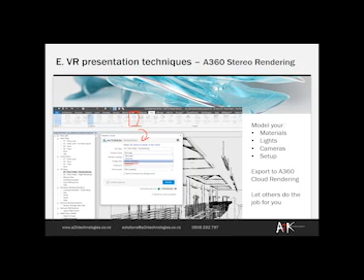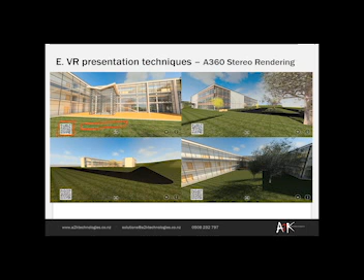So quickly catch up about our A360, where we actually find this. We just go here into render in the cloud, and our dialog will pop up, which then allows us to select a stereo rendering, and we can then experience this. With these codes, we can send the QR code to our client, or a big long code for our web browser. By the way, we can experience this in our web browser as well, and basically watch the rendering and have this interactive landscape.

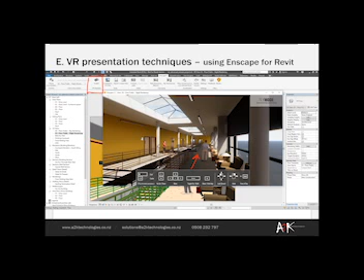Just as a tiny recap, you might have heard about this in the last webcast, where we can also walk through interactively with a virtual reality headset and experience this. Attaching a virtual reality headset is basically nothing else than attaching another monitor, or two more monitors, to the computer. The only tricky part is that the graphics card needs to be a little bit more powerful, because the software needs to address these two screens for your left and your right eye independently, not like Windows commonly does.

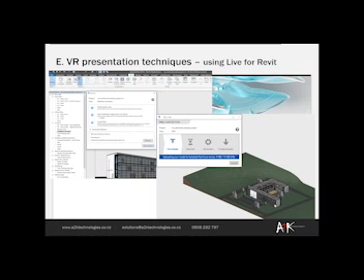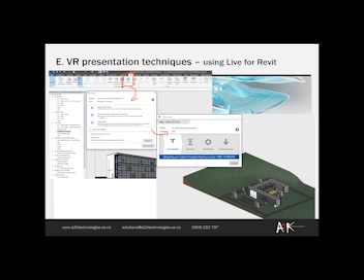So in general, the graphics card needs to have at least twice the power, or better, three times the power, to generate these frames with at least 90 frames per second, because otherwise you might feel motion sick. We have here our Revit. When we go with Revit, if you want to go live here, this would allow us to convert the scene. The reason why we have to do this is that we actually have two types of system in our computer world. Good.

So once it's been converted, we have this with our live application, and we can actually explore this. In the meantime, we also have whole projects. We can just double click on it. They run on their own, so that we don't need any live viewer anymore. You only need a live viewer if you want to do a bit of authoring of different scenes, or adjust your presentation a little bit. But today we want to do this with interactive and have a bit of a play.

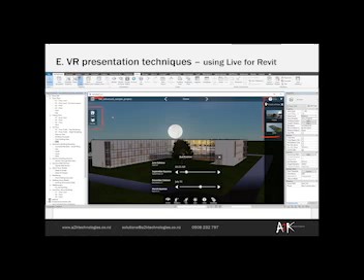Good. So now let's have a quick chat about the two different types of system and why we have to convert this with Live. On the one hand, we have Revit running, and on the other hand, we have Live. Because we work in Revit and we want a very good, glossy, perfect presentation, we work with physically true materials and physically true lights. So with Revit, we actually have a physical system.

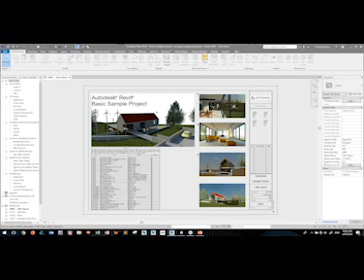So when we now have a quick look into our Revit, come on, be nice to me. We should find here, for instance, an example file. I'm just demonstrating this with example files here, and you might remember the example file. You can do this as well. So if you want to follow this, I can ensure that everybody has these files, and we see here our Revit example file.

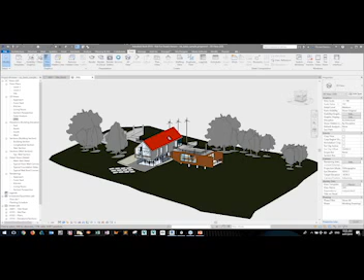So what we want to do is present this now in a virtual environment. So we can go to our view, and we just go Live here and send this out. What Live then does is it immediately downloads a folder, and what we have in this folder is the conversion which comes from the server. So we have our Live project. This is the file you would open up with your Revit Live, but we have shown this in the other webcast.

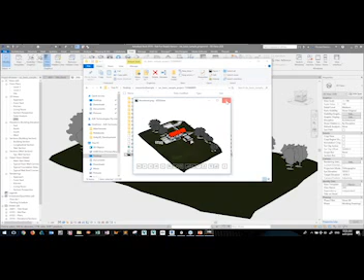So we actually want to see how we can make this interactive. Our Revit architecture basic sample file here with a long number is actually our 3ds Max Interactive project, including also the thumbnail and anything else with it. So we can immediately connect and patch this to our 3ds Max Interactive and start, for instance, exploring this. In the first webcast, I had a tiny run-through of some of these folders and what they actually do.

The advantage is when you convert it, you also don't need to set up any scripts around your virtual reality gear, because it immediately includes this. So if you have any units, for instance for your teleport or for your controller, as well as anything associated with it, you see this in the scene; it immediately comes with this conversion. So it's really cool.

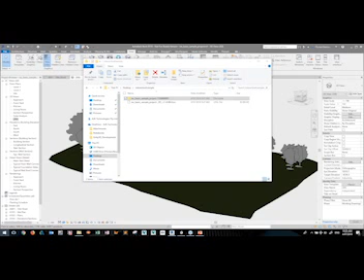Good. So when we go to our Interactive, somewhere we should find a tiny Interactive. Here it comes up, and gives me the opportunity to start a new project.

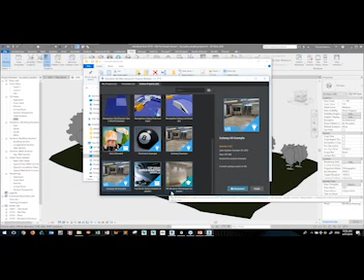If you have time, and well, it's winter anyway currently, and if it's a little bit rainy outside, just have a quick look into some of these online projects. There's some really cool fun stuff you can explore, be it a subway, which has a nice good graphic representation, or also the virtual reality museum, where you have a lot of toys you can play with. These are good scenes to warm up with this whole interactive environment.

Good. So we have here some projects, and I want to add my existing project, which is my live project I just converted. This is the folder here, which comes from my server. So live, and then we have here just .stingray project. In the past, you had to unpack the Stingray project, which was a zip folder, and then you could edit it as well. But here it comes already unzipped, and that's actually pretty cool.

So I quickly open this up. We see our icon, and on the bottom we have here levels, because every computer game has, so to say, levels. So this is how this is being organized. So when you have, for instance, multiple design options, you design multiple levels for your client or for yourself. Good.

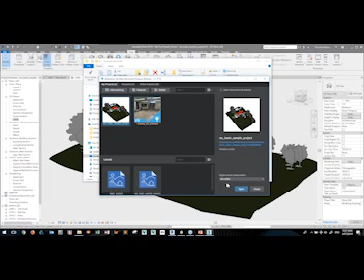So we want to take this project and open this up, and my interactive environment should now compile it, because we are in a development environment. It compiles. Compiling means that it takes my whole content, everything I have set up, my materials, my lights, my scripts, literally anything and everything, and gets it ready and translates it so that the CPU can process this. We see on the bottom right, for instance, my data compiling, and it runs through the assets.

On the right hand side, we will find our Scene Explorer. We find also our property editor. Now it might take a little bit to compile the whole scene, but then it should work. It should be nice to us. Good. That gives us a second to talk a little bit more about the user interface, so we can adjust this, which is good.

On the bottom left, we have an Explorer-like environment where we can browse the assets. Because we develop, we are working with a project folder. We don't work with a single file, so we have a lot of individual files. They're connected with each other, and scripts have been programmed and associated with our geometry or with our environment. On the top, we find our viewport.

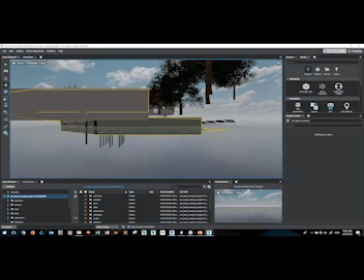So any interaction, or any script, is then being added on to our component. So let's see if Max is nice to us. Yes, 3ds Max Interactive, is working nice. We probably need to zoom out a little bit for that, and come on, be nice.

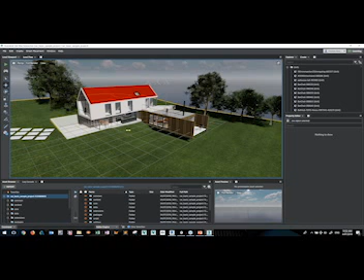So quickly about the navigation here. How the navigation actually works is, we use the left mouse click or left mouse button to select something, and we use the middle mouse button to pan, and the right mouse click, the right mouse button, to roll our view. It's a bit sensitive here. If you hold Alt and use your left mouse button, you can orbit from your current point. And if you use your right mouse button with Alt, you can zoom in and zoom out.

Brilliant. Need to move this up a little bit. I actually always wondered about the red roof, because I think it's actually very, very poppy. So if you want to touch up the materials here in Interactive, you can do this. It makes use of some basic maps, be it a diffuse map, or a texture, and also a UV map.

When you want to develop, or add on any assets, they need to be within this project folder. Same thing is like in Unity as well, they need to be within this project folder. Then you can connect and patch it up, and the project knows and understands that you can have here your artificial world, and apply the new texture to your new artificial world.

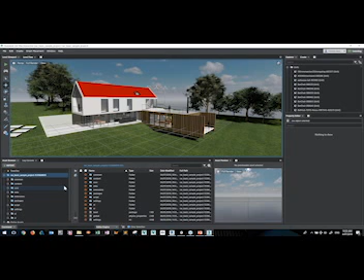So let's select, for instance, this roof. We get our common gizmo when we want to move these around and about. On the right-hand side, I need to touch up my Explorer a little bit, because otherwise I don't see my materials down there. So I need to just drag this up a little bit. And there are my associated materials, these are the materials converted coming from Revit.

You see here these two materials, which show that we have kind of two layers or something. We have here the gypsum wallboard, which is probably the inside of our roof. And then we have the metal something, which is basically the red part of it.

What I really like is when you work here and touch up your assets, you can immediately go to the resource. When you click on this, the machine works and looks and searches the resources for you. When you have an artificial world, you might have dozens of resources, which might make it harder to follow. So hence, it's good to have a very organized structure. If you want to store all these files just on your desktop, believe me, you won't be happy.

So hence what we want to do is, let's change this red material a little bit, I think it's a little bit poppy. So I would go here to my data, use a right mouse click, and say I want to create a folder here. Let's call the folder, for instance, images, something where we want to add on my custom images.

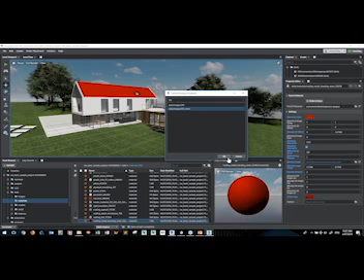I have adjusted it and added on a little bit of a normal map, and we see now here we have our material on the right hand side, right bottom. When you have a look in the scene, it actually also updates it.

That was here we need to go, just slipped from my alt. It can happen. So we see a little bit of a texture on it. Why not? So we want to have the bump map a little bit more crispy. Let's say we want to have maybe a 5 here in my bump amount and my value, and we see there are updates, so now we get a bit of a texture on it.

It's good. So the tint color sure is red. Now we want to make this maybe also a little bit more greenish here, so that it blends a little bit more into the environment. However, I'm actually working with my tint color here. We actually need to have my generic color up there to work with.

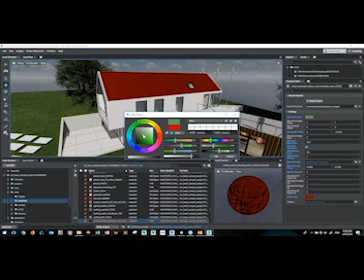Let's see, otherwise we can try both. So make this maybe a little bit greenish here and see. Good, didn't change too much. Here we are now together, together we are strong. So I have my tint color here, make this maybe a little bit darker, so that it blends a bit better into the environment.

So now, when you want to change maybe just simply the color, select it, for instance here. We find it's a little bit more, we can maybe adjust here. I think instead of having this brown wood, we want to have maybe a little bit of a bluish wood, for instance. I think it's here somewhere, our finish interior timber cladding. Let's go there, let's have a look into this, and see does it change it?

Yes, that makes it, for instance, also a little bit bluish here. That's good. Hit OK. And we want to add maybe also a little bit of a different

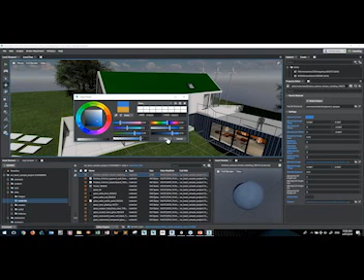bump map, for instance, here. Let's choose, we had, for instance, here, the 191, add this on actually as well. So we see that we can still actually adjust this afterwards. And also we can work here with our sizes,

Tile it, make this a little bit different here. And we see that we have actually a nicer different cladding. So anything you can set up, you can actually also adjust. So good.

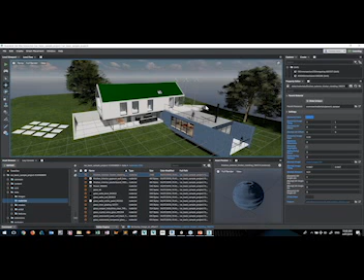Good. Let's have a look a little bit into the lights, because we want to make this here actually a little bit interactive. That's what the whole session is actually about, how we can actually do this. And so let's say, for instance, we want to have here

I probably wouldn't get a job as an architect. Good that I'm an engineer.

And we have, for instance, here our lights. For instance, here, maybe we need to zoom in a little bit more. We can basically zoom into the building.

Then we can select, for instance, here our lights. Good. So we have here, for instance, our lights now selected. And so I want to add a little bit of a functionality to these lights, like it would be, for instance, a game where I can, for instance, want to dim these.

We have here now the option with our level flow to wire up logic. Similar, you're probably familiar with Dynamo. We can look, for instance, here for our lights on the right top and say, for instance, here light. Take, for instance, the unit, literally basically in here, and then start wiring up, for instance, here our logic.

Like in Dynamo, we wouldn't have the option to look for our nodes. We can access the nodes just through our right mouse click. So we have here our level unit we actually want to work with.

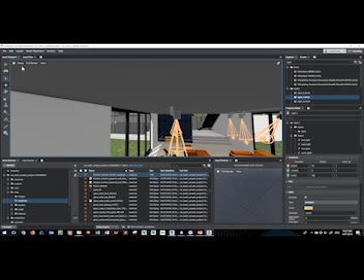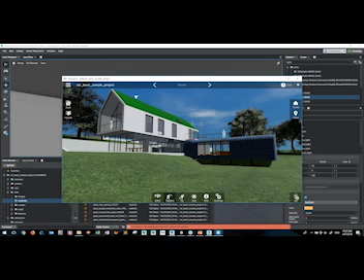So what you see is that it's being compiled, and it looks like what we have in live. Here we can go to our tab, for instance. These are the scripts which are available here. When we browse, we see the change of our materials, the greenish roof, and we also have our bluish pattern. So let's go a little bit to the inside. Let's get inside the building. We can browse around. So how do we test the lights now?

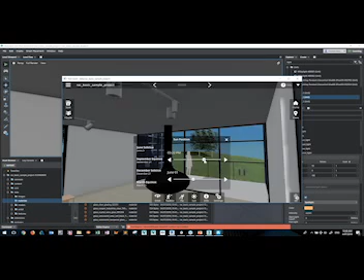Remember, we did a check of this light here. So for this, we still have access so we can work here with our sun. So I'll make it a little bit dark, and I'll check our sun. So let's go around here, so that we maybe see our light a little bit better. So there should be my light.

And so if you experience this now with head-mounted display sets or with your VR goggles, maybe with the controller, you can experiment, so to say, with your lights in this model, and discuss, for instance, the light settings, the intensity of the light, how it looks in the evening, how the scenarios look, or how the design looks having multiple scenarios.

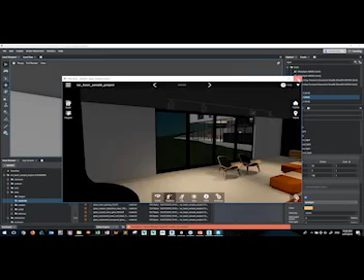So the advantage here, of course, is we can just do a simple wire up of this. Can I still use some programming? Yes, we can still do some Lua programming. So if somebody's interested in doing some hard coding, we can do this here. Let's have a quick look into our script, and maybe here as well, where we get some values. So we can still wire everything, program everything. It also offers you to develop your own nodes here, if you know a little bit about C++.

Good. So what other options do we have? Well, if you go to Unity, unfortunately we can't convert it. So basically you start developing and compiling your whole design from scratch. You bring everything in from scratch, like into 3ds Max. Many actually do. While 3ds Max Interactive would allow you to work live with 3ds Max. So what you do in 3ds Max also comes through into 3ds Max Interactive.

On the other hand, when you want to do some real programming, you're going to do some deeper interactions, for instance with sensors, or maybe you have a Raspberry Pi you want to connect to your model to measure real-life scenarios and reflect this on your digital twin. It's probably easier to do this with Unity.

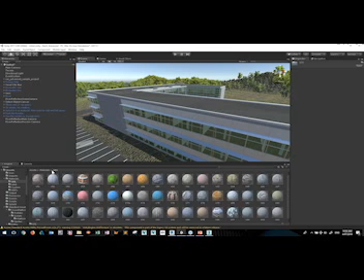So when you want to develop a new script and program this, ideally we have everything in our folder. Maybe we have a folder where we talk about materials. I have prepared here already a couple of materials to work with, and these are the materials we've just seen before.

Good. So when we create a script, we start here with the right mouse click, create a script and say I want to create a new C# script. It's a MonoBehaviour script. Fantastic. How do we want to call it? Let's call it, for instance, change material.

Okay, so change material. Now we want to edit it. Let's open this up in Visual Studio, for instance. You can connect this with Visual Studio and have here the MonoBehaviour script. For this you need to know the code, because otherwise it doesn't work. We have here a little change material script.

Good. So everything we do now is here in brackets. Everybody has their own way of organizing brackets. You will probably find that I'm a little bit conservative with how I organize my brackets.

We have libraries running in the back end we make use of. So we also need to refer to some other libraries, because especially when we want to save the change, we need to access our system. So we want to use our system library, System.IO, I think it is. You see how it comes up, and then we have a semicolon.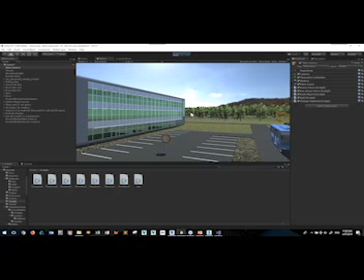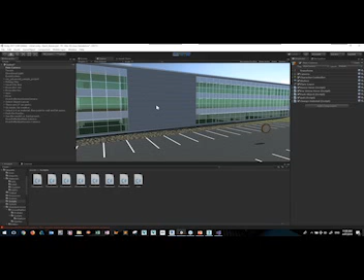how this works. So when I now point, for instance, here to a wall, then we find that main camera change material has not been assigned. Good. Oh, we need to apply a camera to it, because otherwise it wouldn't work. So this is when we do some troubleshooting and debugging. I need to assign my main camera to this thing. So main camera, change material, then it recognizes it, because otherwise the computer can't process this, I believe. So it should be nice now.

Oh, fantastic! Something does change. I have chosen here in our example some poppy colors so that we actually see the change. And when we now have these interactions with the materials, they are actually also being saved, basically being stored in a CSV file. We can then also open it up or bring it back into Revit.

So we're somewhere here, we have Revit Advanced, and there's my CSV file, for example. Quickly open this up, and you see I was playing with it a little bit just before, and it records the changes, my interaction with it. So how do I get the project ready for my client?

When we go to my build settings, we need to build this, basically compile it, a final compile process for my project for my clients. We can get this ready, be it iOS, Android, or TV, and have your player settings up and running, where you can set up your settings, your icons, your run behavior for this particular environment. So every environment needs to have their own libraries installed.

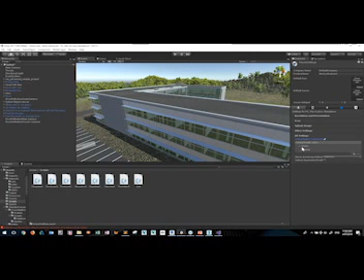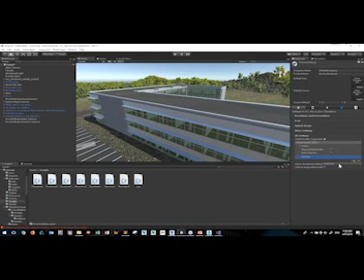When I go out of this player mode and go back, we have virtual reality supported, if you want to support it, and what type of gear we want to support. You might want to work with OpenVR, with a Steam VR set, and then we can just add this on and select it. So it's not much we need to do. It's like you would plug two more screens in, one for the left, one for the right eye. The only thing is that we need a bit of a stronger graphics card, and then we explore and experience the virtual reality.

When you want to do this with Interactive, going back, we also have the option to compile this as well. It's called the deployer. Under the D tab we should find the deployer, which allows you to adjust the settings for Android, iOS, PlayStation, or also for the web. And then you just say package your project for Windows, and you have your executable file where the client can explore, play with the lights, and send you the recording of any change, if you like.

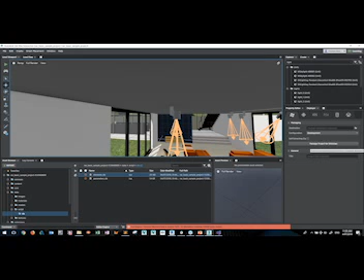So good. I hope you had a little bit of fun exploring and seeing how everything works, how we can have our virtual reality landscape where we can add some interactive technology to it.